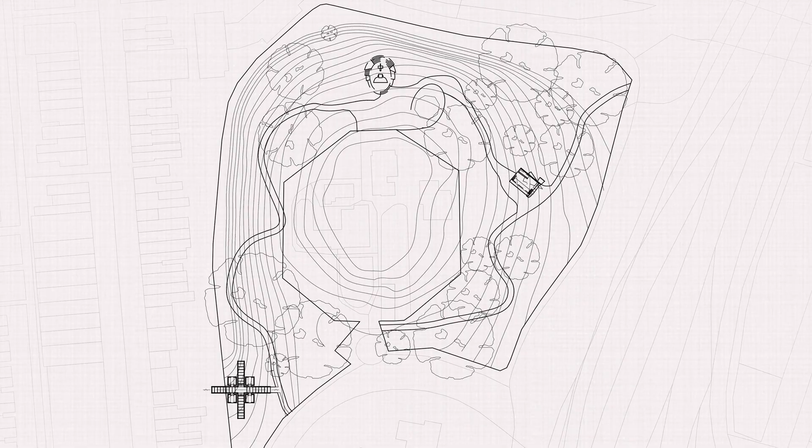It facilitates a place to make it possible by providing a space and the resources to create an architecture of protest. To get to this point, I explored some of the feelings imbued within the Uluru Statement and tried to understand how they could be reproduced in a tangible manner.

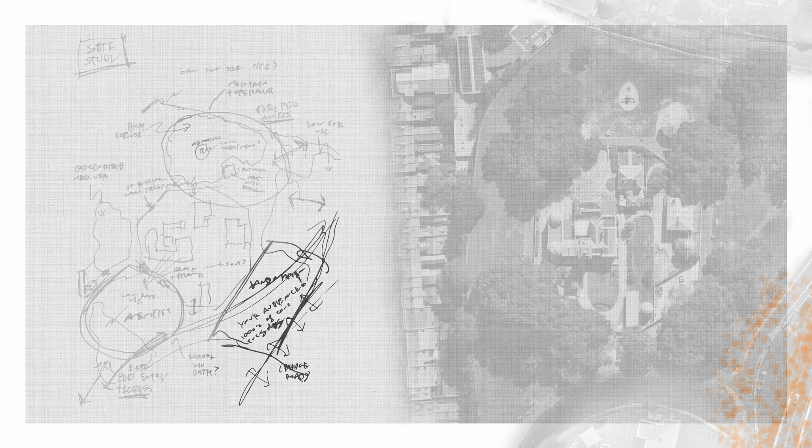It was the exploration of all of them that really helped to shape my understanding of the brief and my overall response. When analysing the site, a couple of things stood out to me, such as the existing amenities and the fence around the observatory. I also looked at high use, medium use, low use areas, views from the highway leading to the harbour bridge, the pedestrian path of people visiting the site, and the areas already covered by trees.

In response to this analysis, I gave myself a brief which comprised of 3 key criteria. Much like a protest, the site has artefacts from different backgrounds, from different periods of life. My proposal suggests to unify those in various ways to reflect the future program of the site.

The first of which is the Boer War Memorial, which is surrounded by very harsh, unconsiderate concrete, and I propose to add some garden beds and steps to create a better place for people to relax.

Next is the Rotunda, which is sitting quite high at the moment and isn't really accessible to everybody, so lowering it so that anybody can access it.

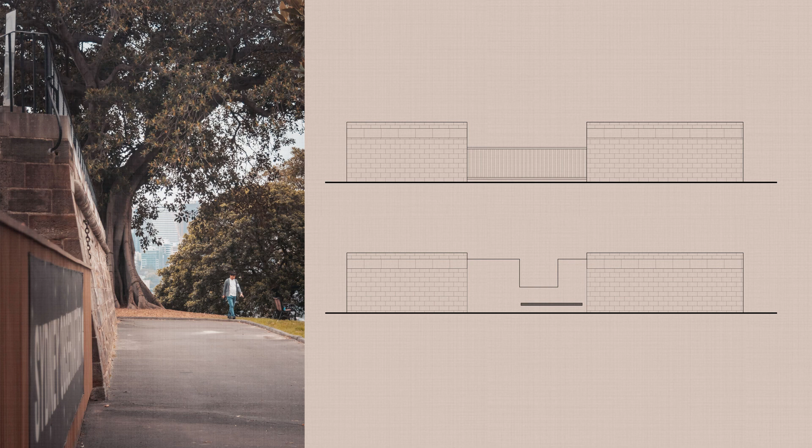The third, there are a few nice stone fences, but also unconsidered timber ones. The idea would be to remove those and replace them with new stone fences that serve as a fence, but also viewpoints and seating opportunities too.

The construction of a landmark on the eastern area of the site has got a dramatic form which is derived from the exploratory study of harmony. For those passing by on the freeway, it will generate a sense of curiosity, and I hope it will give them a desire to find out more about the site and come to it.

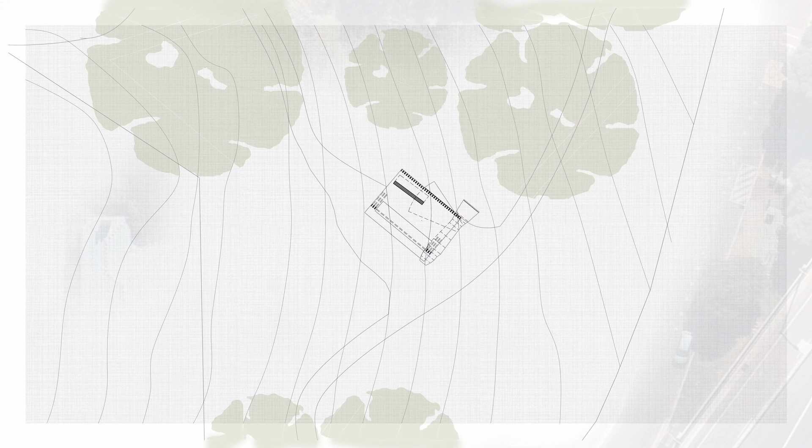The relatively flat and clear areas nearby serve as ideal earthscapes for the preparation of protest materials. I thought it would be better to use a lawn rather than specifying tables, because I didn't want to dictate the size or output of any of those protest materials.

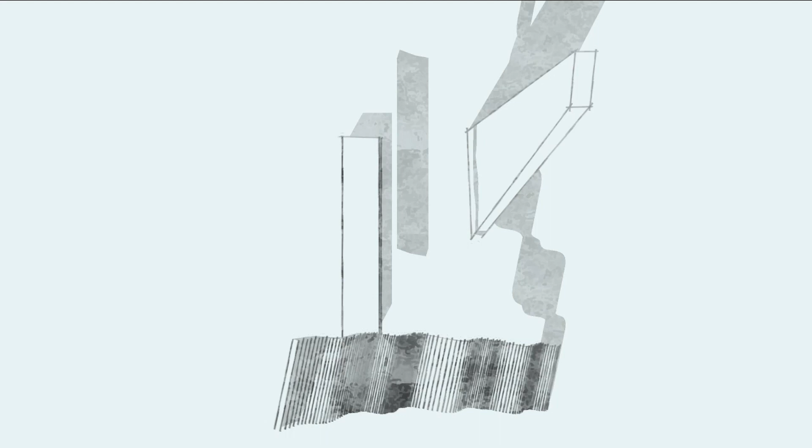It's more of an outdoor living structure rather than a typical building. On a pedestrian level, it's a hub containing amenities for food preparation, which can be accessed by anybody at any time of the day as they wish, including on the day of the protest.

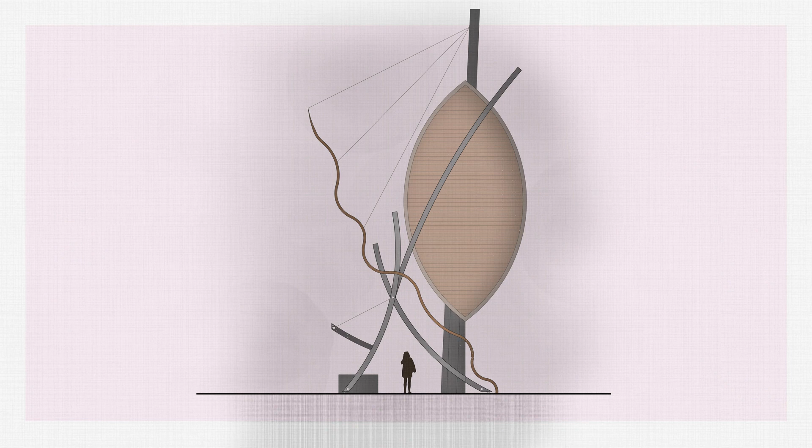I thought it was important to provide such a space because it really builds upon the existing program as a picnic and viewpoint. It will serve as a meeting place for the annual bridge walk as well.

After the bridge walk, the banners are to be repurposed and can be used for picnic mats or stored to be used for other events. I'm going to explain how that works here.

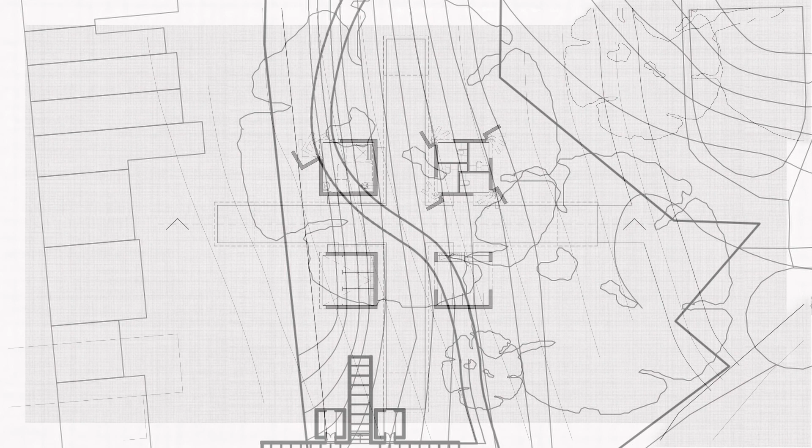Finally, we have the library and amenities block, which uses the southwestern corner of the site near the Agar Steps. In terms of the amenities, it provides not only toilets but also showers and washing facilities to give everybody a reason to come to the site and feel welcome.

Being somewhat homeless myself, I understand the difference that having these kind of facilities has in making you feel like you're free to come or excluded from a site.

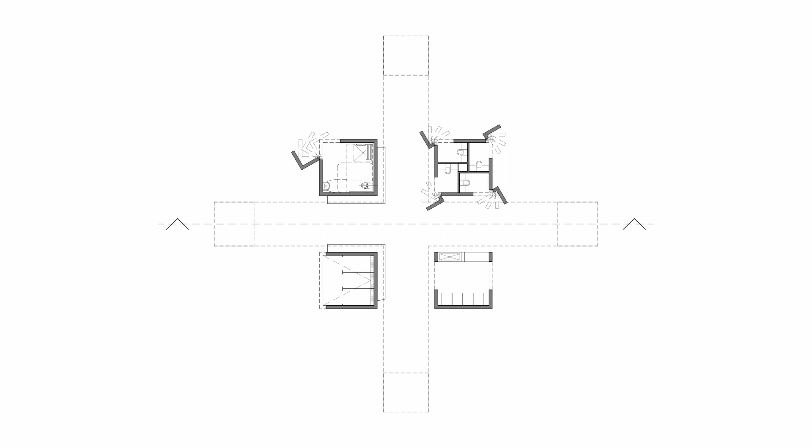Resting on these pillars of central human function is a library of sorts, which doesn't only serve as a critical aspect of a form derived from community, which is the interlocking blocks which rely on each other to stand up, but it's also a place where people can access the banners at any time and any day of the year.

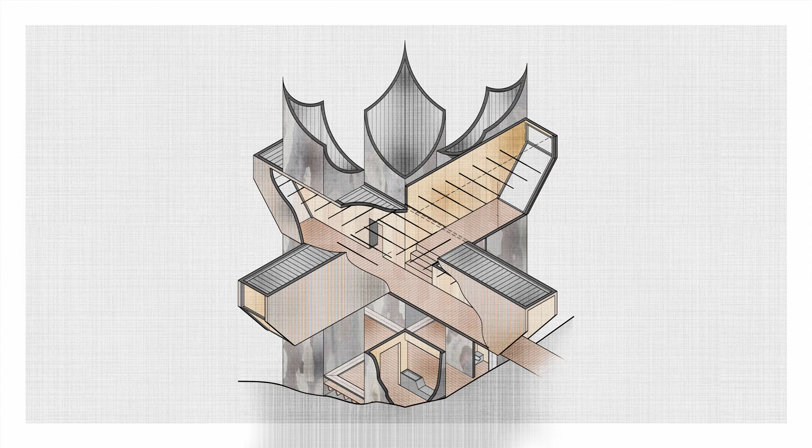Whether they use them as a picnic mat or take them to another protest, the choice is up to them. Naturally, some items will not be returned, and that's fine because this is not a formal traditional library under guard by rules and regulations, but rather a living library that will change and adapt according to what is relevant to that point in time as the users of the site shape their own history with their protests.